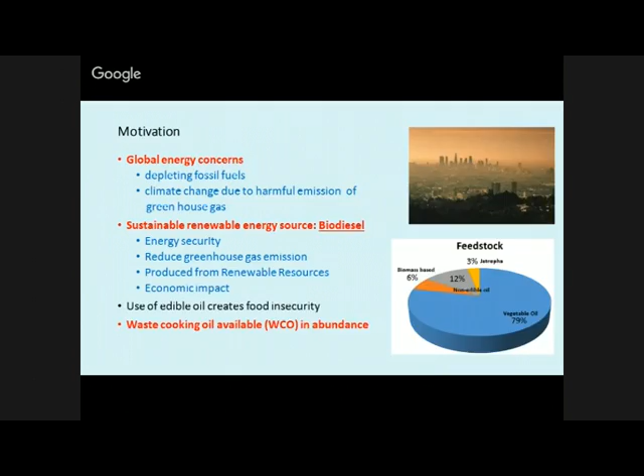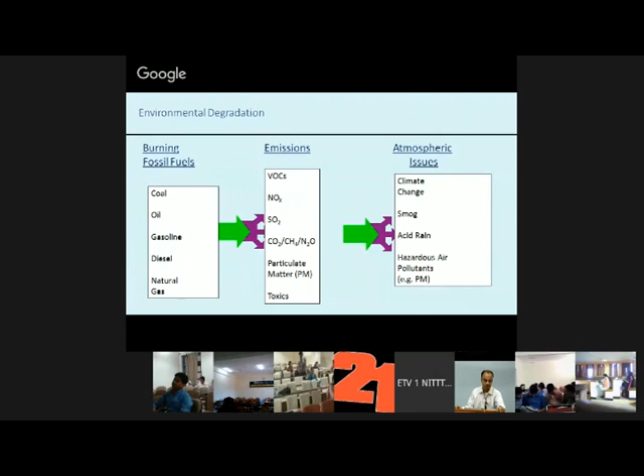As you know, if you use conventional energy sources, environmental degradation is a main drawback. The sources of burning fossil fuels are coal, oil, gasoline, diesel, natural gas. All these after combustion produce emissions consisting of NOx, sulfur dioxides, carbon dioxide, methane, particulate matters, and toxics. All these emissions have a severe impact on atmospheric issues, which causes climate change, smog, acid rains, hazardous air pollutants, and various other things. Due to that reason, there is an impact not only on human beings, but on animals and crops also.

Therefore, environmental degradation has become a big issue in this century, and our objective is to use renewable energy sources in such a way that environmental degradation should be minimized.

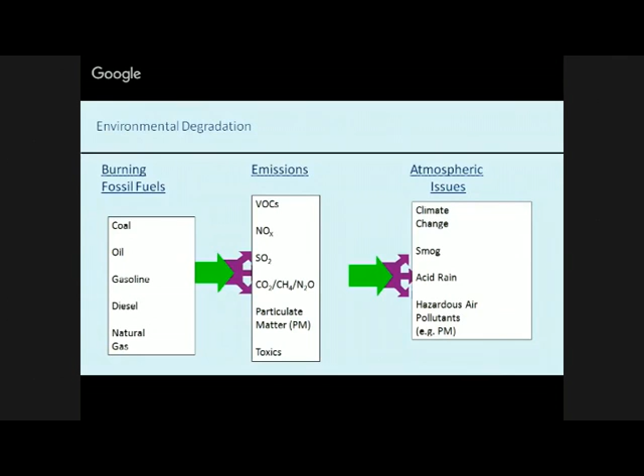In our country, as far as automobiles are concerned, we use petrol and diesel. In most of the other developed world, consumption of petrol and diesel is almost equal, a 1:1 ratio. But in our country, the gasoline demand differs—gasoline, that is petrol, is used in cars and other four-wheelers, whereas diesel is used in trucks. Though the number of trucks is less compared to cars, the total consumption of diesel is very high compared to gasoline. The data up to 2011-12 shows diesel consumption is around 5 to 6 times higher compared to petrol. So a slight change in diesel price will have a severe impact on our economy, whereas a change in petrol price will not affect much.

Ours is a typical special case where a substitute for diesel is more important than for petrol. For petrol, people are substituting with ethanol, but in the case of diesel, we can substitute with biodiesel. So biodiesel is more important from an economic point of view, since our diesel consumption is 5 to 6 times higher than petrol. This is a unique problem our country is facing.

As far as feedstock sources are concerned, at the national and international level, the country which has an excess of a particular source consumes that oil for biodiesel. Palm oil is available in abundance in Malaysia. In the European Union, rapeseed oil is in excess. Soybean is in excess in the USA. Sunflower in Argentina. Jatropha, a non-edible oil, is found in India. And in the Philippines, coconut oil is in excess.

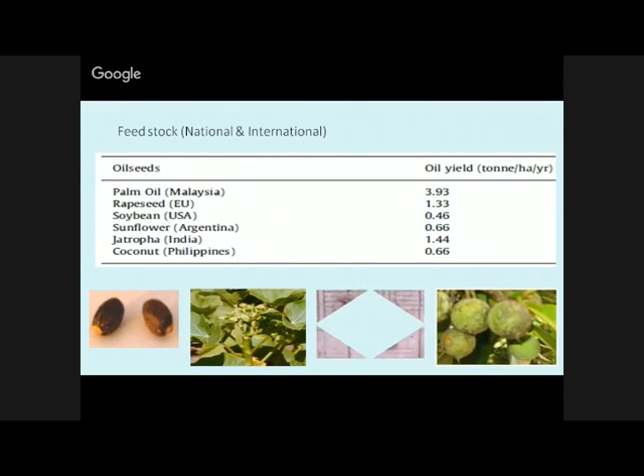Other conventional feedstocks include mahua, palm, karanja, and tobacco seeds—almost any oil, whether vegetable oil or non-edible oil, can be easily converted into biodiesel in principle. So the point is that whatever localized source is available, one should try to convert that oil into biodiesel, rather than focusing on one or two types of species, which is not good for long-term impact as far as nature is concerned.

The non-conventional feedstocks in our country are not very popular—lard, tallow, poultry fat, fish oil, bacteria, algae, microalgae. These are almost non-conventional feedstocks, but experts say they are very important from a future point of view.

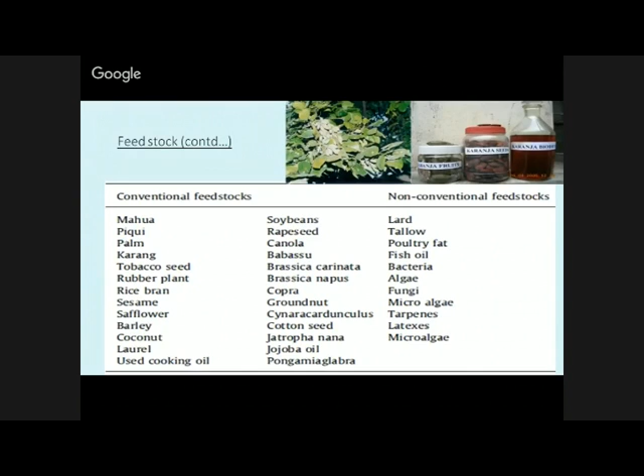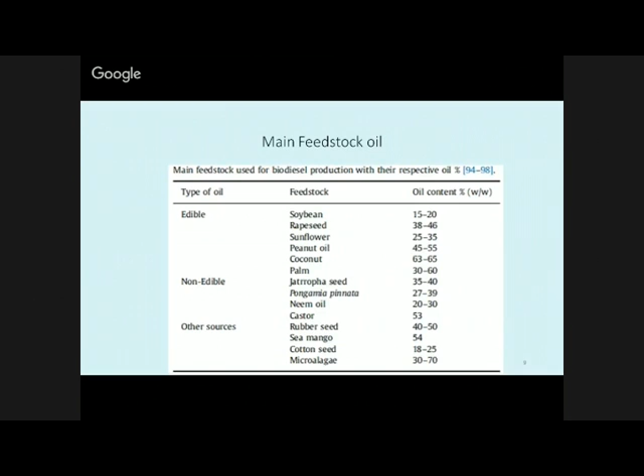In Rajasthan and Gujarat, one of the important sources is Citrullus colocynthis, popularly known as thumba. These seeds are separated from the fruit, and then oil can be extracted from the seeds, which can also be easily converted to biodiesel.

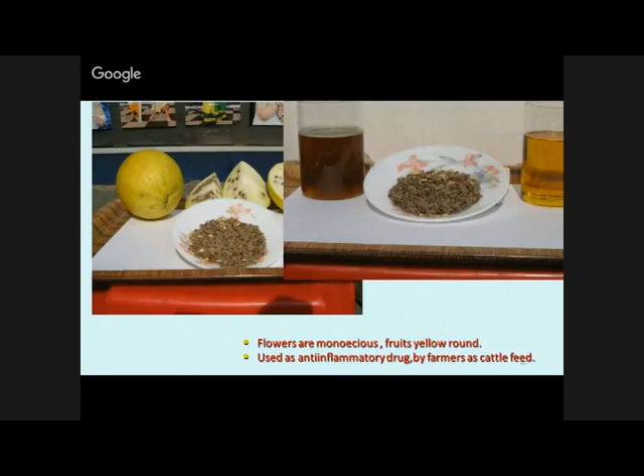This particular thumba has some anti-inflammatory properties. It can be used by farmers. It can be used in cattle feed. The flowers have some medicinal value. So likewise, it has some other applications also.

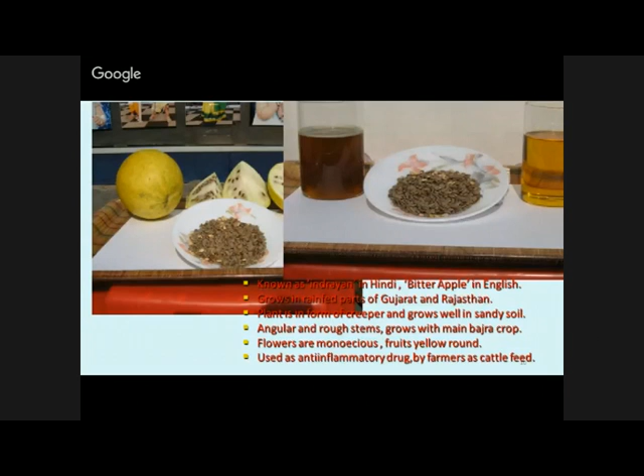And at present, if it is not used for biodiesel, it is sold to the soap industry, which is purchasing in abundance. These seeds are known as Indrayan in Hindi and bitter apple in English.

With these sources, now I am going to discuss the conventional methods or techniques through which we can produce biodiesel. This technique was known even more than 100 years back, but at that time the price of petroleum was not very high. So due to that reason, much development has not taken place, because at that time the per gallon petrol price was quite small. So people focused more on internal combustion engines. But the technique was available even at that time, even in South Africa.

In the conventional method, what happens? There is a mixture of oil and alcohol, mostly methyl alcohol. People say that it is a green process, but the objection is that methyl alcohol is again a petroleum product, and therefore this process cannot be called a 100% green process. If you use biomethanol which is produced through a green process, then we can call it a 100% green process. Otherwise, you have to use, for example, ethyl alcohol or other things. If you use it, then we can call it a 100% green process.

The catalyst, taken on a weight percentage basis, may be homogeneous. At present homogeneous catalysts are the most popular, but at research level, people are working on heterogeneous catalysts. So this mixture of raw oil, alcohol and catalyst is added in a reactor, and a stirrer is at the center portion, through which continuous mixing takes place, and finally the immiscible layer between the alcohol and the oil breaks, and the heavy molecules are converted to smaller methyl ester molecules in terms of biodiesel.

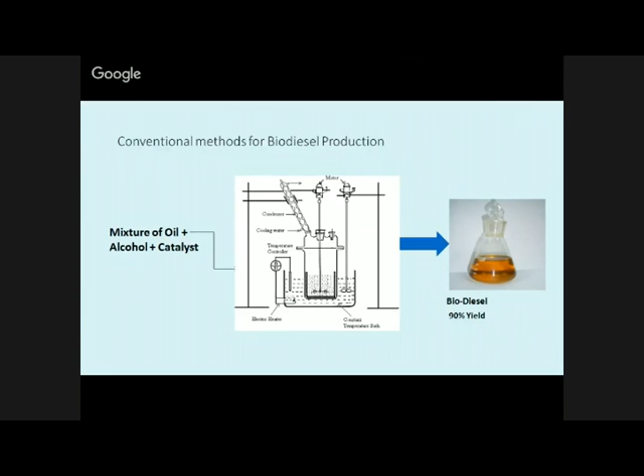In terms of weight ratios, roughly around 100 kg of triglycerides, meaning any vegetable or raw material oil, mixed with 10 kg of alcohol; this reaction is based upon the stoichiometric ratio. Normally, alcohol is taken at double the stoichiometric ratio, so that the reaction is always in the forward direction and cannot go in the reverse direction. If the reaction takes place in the reverse direction, soap formation will take place.

From the chemically correct ratio point of view, we can convert 100 kg into 100 kg of biodiesel, meaning 100% conversion. And besides this, we get 10 kg of glycerin, which is a byproduct. This byproduct has a very high calorific value, and it can be used as a fuel also.

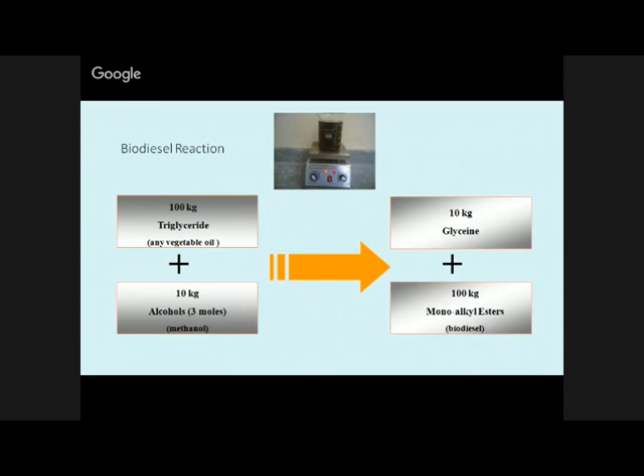If you look at the chemical formula, the fat or oil triglycerides react with 3 moles of methanol, and finally we get glycerol plus FAME, fatty acid methyl esters. This fatty acid methyl ester is the biodiesel we get after the reaction. Now if this reaction is done in conventional reactors, with mechanical stirrers, it requires a huge amount of time, sometimes more than 1 hour.

So the conventional technique has drawbacks: energy consumption is high, time requirement is high, and besides, the process is not environmentally friendly. There are various issues: the catalyst is considered to be a pollutant, and water washing also creates trouble, and therefore new methods are required to reduce the time, with an environmentally friendly process as well as less energy consumption.

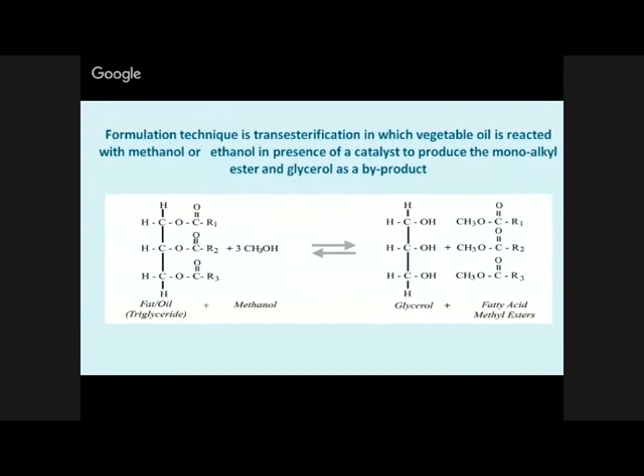This is from the chemistry point of view. A triglyceride reacts with 3 methanol in the presence of a catalyst, and we get glycerol plus biodiesel. So glycerol is always a byproduct when you use this oil plus methyl alcohol in the presence of a catalyst, maybe a basic catalyst, that is potassium hydroxide or sodium hydroxide. In that case, on the product side we always have glycerol plus biodiesel. So glycerol as a byproduct we are always getting.

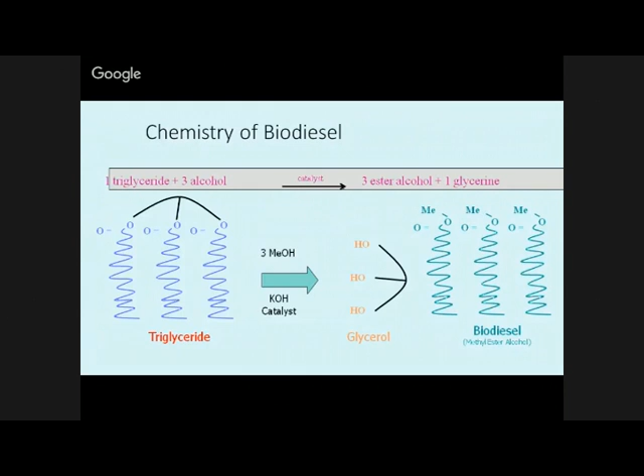In terms of plant point of view or block diagram point of view, let us take an example of karanja oil. If it is mixed with alcohol in the presence of KOH, we get unrefined biodiesel and glycerol. Normally, instead of 3:1, we add excess alcohol. The excess alcohol after the reaction has to be separated so that it can be utilized again for the next cycle. Once the alcohol is removed, we get alcohol-free biodiesel, and then it is washed with water.

After washing, the wash water also plays a pollutant role, and it erodes the land. So if a big biodiesel plant is there, one has to think how to tackle that. Then, after removing the wastewater, the biodiesel is heated to remove the moisture. And finally, the neat biodiesel B100 means it is now a pure biodiesel.

Once it is mixed with diesel, based on how much fraction is mixed, we call it B10, B20. B10 means 10% biodiesel, 90% diesel. B100 means 100% biodiesel and 0% diesel. This B100 we can directly use in compression ignition engines, and people say that up to 30%, if you add it to the diesel, there is no need of any change in the design of the engine itself. Almost the same performance you can get using CI engines.

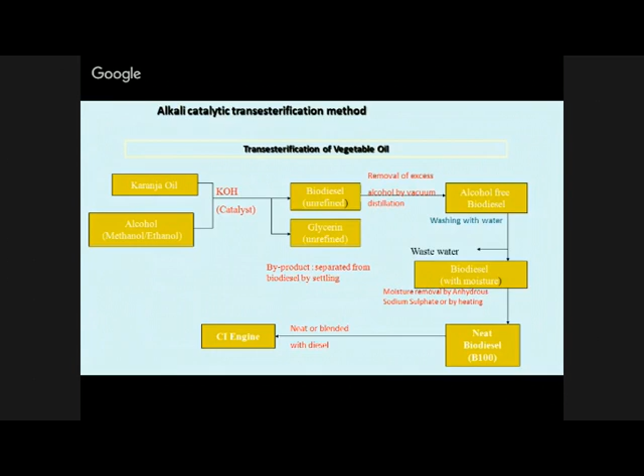As I have told you, there are certain challenges faced by conventional techniques. In the raw feedstock oil, the main important variation is the FFA content, meaning free fatty acid content. If this content is less, say less than 2% or 3%, then in the presence of an alkali catalyst the reaction can take place very fast. But if the FFA content is high, sometimes soap formation takes place, and there are difficulties in the reaction to achieve the biodiesel product. So in that case, two-step reactions are followed, where first the FFA content is reduced, and then in the presence of alkali catalyst the biodiesel conversion takes place.

Besides this, we have to take care that water is not present in the raw oil, because once water is available, saponification will take place, and the oil will be converted to soap, which is the anti-reaction of biodiesel. Besides this, as I have told you, washing is a big problem. So removal of residual triglycerides and glycerol from the product is important. Only then can we get standard biodiesel which matches the standards available in the literature. Of course, glycerin is a byproduct, there is difficulty in complete conversion, and wastewater is a pollutant.

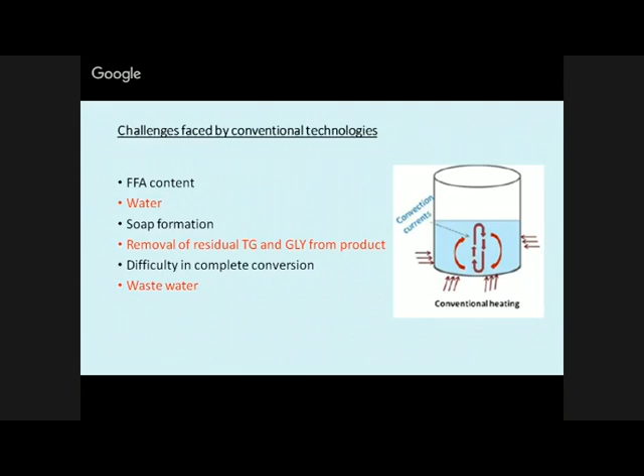Before I discuss the recently developed techniques, known as non-conventional techniques, I would like to classify biodiesel process intensification. The conventional method I have already discussed, which includes mechanical stirring, and its drawbacks also. Now, in the last decade, most of the focus is on non-conventional methods, which include ultrasonic methods, microwave methods, hydrodynamic cavitation, and sometimes hybrid methods, meaning a combination of any two techniques, ultrasound plus microwave, or ultrasound plus hydrodynamic.

In these techniques, ultrasound, microwave, and hydrodynamic, the reaction takes place at atmospheric or slightly above atmospheric conditions, whereas in the supercritical method, the reaction takes place at very high temperature and pressure. So industrial viability is a question mark. But the advantage of the supercritical technique is that the catalyst is absent. The catalyst is a big nuisance, so the main attraction of the supercritical process is that the reaction can take place without catalyst. So we will discuss these non-conventional methods one by one and their status in the literature.

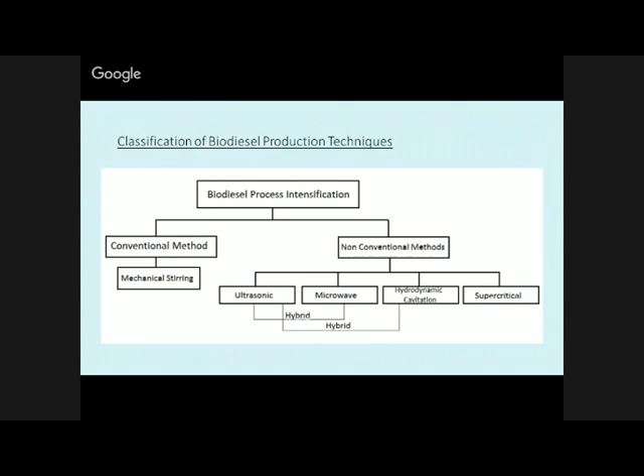Process intensification techniques: PI is the term used to describe the strategy of reducing the size of the chemical plant needed to achieve a given production objective. Means if a plant is efficient, the size will automatically reduce. Any chemical engineering development that leads to substantially smaller, cleaner, and more energy efficient technology is called process intensification.

That is the main objective from a chemical point of view, that a process can be efficient if the size is reduced, time consumption is less, and an environmentally friendly process must be there. So with this objective, the focus in the case of PI techniques is that reaction time should be less, and conversion rate or yield must be high.

In most cases, in conventional reactors, the ratio is 1:6, means twice the alcohol you have to use. Of course, it can be recovered, but still the total cost will increase. So if a lower molar ratio is used as compared to the conventional techniques, that is always welcome. Then low catalyst: as I have told you, the catalyst creates a pollutant. So if you use a lower percentage of this homogeneous catalyst, it is always welcome.

Lower total operating cost and energy consumption is also a focus. Besides this, instead of batch production, people now also focus on continuous production and separation of reaction products. Recovery of glycerol, catalyst, and excess alcohol is also important.

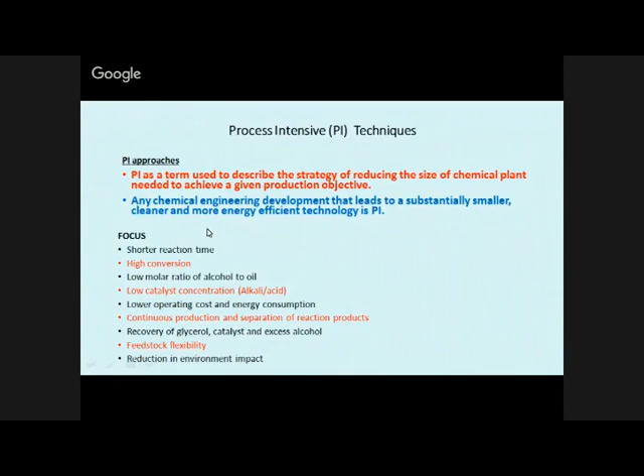Now, among those PI techniques, one important PI technique is ultrasound cavitation. This is from the last decade. Ultrasound has a huge number of applications in the chemical industry. Earlier it was used to mix two immiscible oils, and later on it was thought that it can also be used for the transesterification reaction to produce biodiesel.

In this process, as we see in the right hand side diagram, due to ultrasound waves, very small micron level bubbles are formed. The stages are formation of the bubbles, growth of the bubbles, and then collapse of the bubbles. Due to these three mechanisms, the mixing of alcohol with oil happens very fast, and the transesterification reaction gives biodiesel very quickly. Further, in this process we can get a high FAME yield, expected to be around 96%, in 30 minutes.

Remember that time is a very important factor. If you consume more time, you are consuming more energy. In conventional reactors, the time requirement is around 1 to 1.5 hours, or sometimes 2 hours. Whereas in this case, the same yield and quantity of biodiesel you can get in less than 30 minutes. It means we save time and total energy consumption, plus the quality of the biodiesel is quite good.

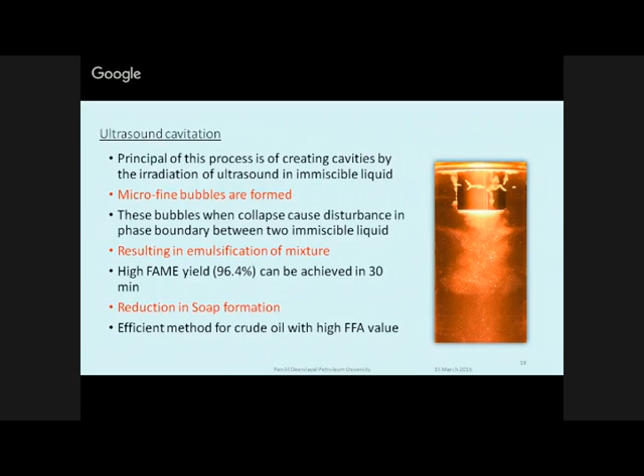Normally, Japanese scientists have proved that frequency of irradiation between the range of 28 to 40 kilohertz. In this frequency, whatever the alcohol and oil mixture is there, they will be converted into biodiesel. Above this frequency doesn't have impact, as well as less than 28 kilohertz frequency also doesn't have an impact for mixing. This is the range of frequency where easily you can convert the oil plus alcohol mixture into biodiesel.

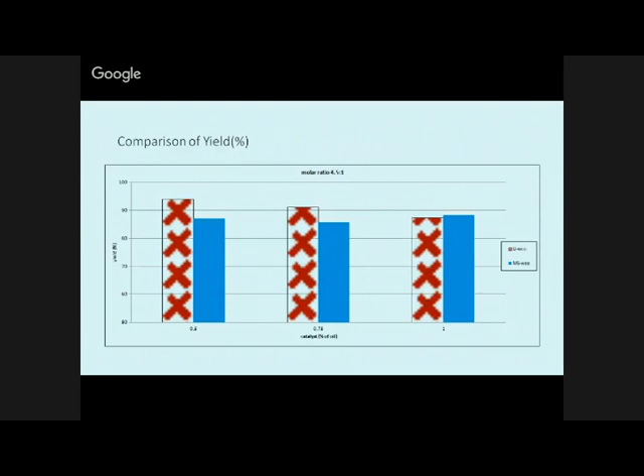These are the experimental data we have achieved when you compare the yield of ultrasound and yield of mechanical stirrers. This is for a molar ratio of 4.5:1, means 4.5 is the alcohol and 1 is the ratio for the case of this oil. You'll see that yield is above 90% as compared to mechanical stirrer. Mechanical stirrer less than 90%, whereas in ultrasound it is more than 90%. The yield is clearly higher in ultrasound as compared to the conventional mechanical stirring method.

Besides this one, you see that there is a drastic reduction in the time. For same conditions, in the case of conventional stirrer, the time requirement is 40 to 45 minutes, whereas in the case of ultrasound, within 15 to 20 minutes, you can get the transesterification reaction. Means a time saving is there, plus at the same time, you can get a good quality of biodiesel.

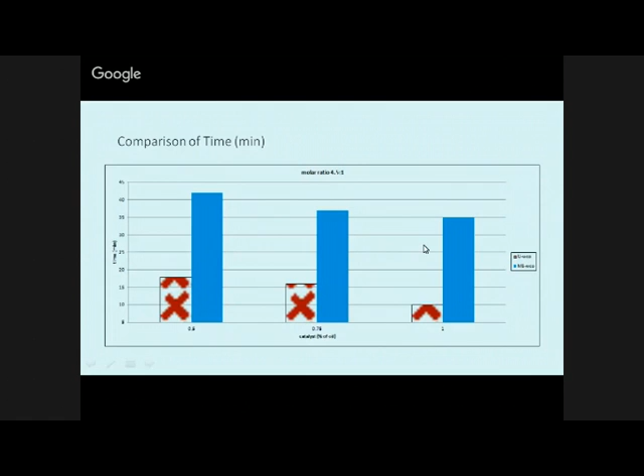This is a typical 100-liter capacity which we have produced in Pandit Deendayal Petroleum University, and at a time we can produce 100 liters of biodiesel. Normally, you can see in the earlier diagram it was a batch production. At one time you can produce it, and then you have to remove that particular raw material, and then again you have to add some fresh material. So that's why it's a batch production.

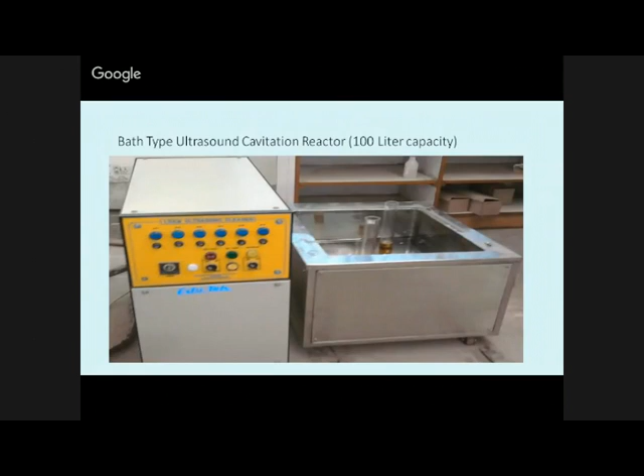People are also focusing on, at a commercial level in the United States, these ultrasound cavitation reactors are also available in a continuous type, where feedstock is added with the alcohol and mixed in this particular portion, and then the ultrasound reactor is there. Due to ultrasound waves, the mixing here will take place, and it will go through this path, and then in this column separation of biodiesel will take place.

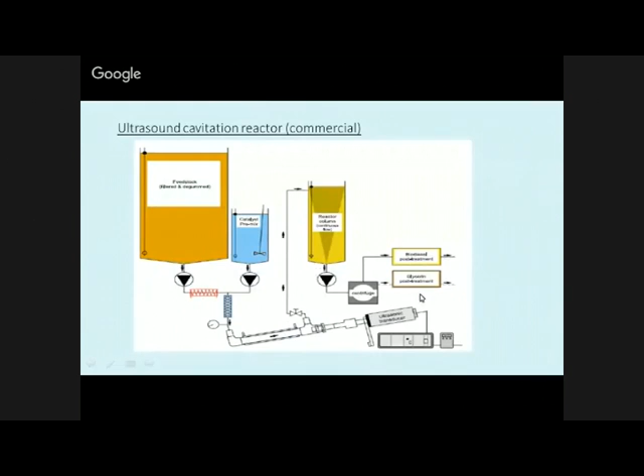Because the glycerol and biodiesel have different molecular weight, by centrifuge, biodiesel is separated from glycerol, and then biodiesel is supplied for the application purpose, and glycerol is again collected and it can be used for its own applications. So this is a continuous type process, unlike the batch production.

The present status of ultrasound assisted transesterification: this process, ultrasound cavitation, is very successful in enhancing the mixing of reactants with either homogeneous or heterogeneous catalyst, leading to significant reduction in reaction time. As I have told you, the reduction in reaction time is very significant as compared to biodiesel conversions using conventional transesterification.

Still, a lot of work has been done in the case of ultrasound, but the majority of the research studies carried out so far focus on parametric and optimization investigations, with a number also studying catalyst leaching and reusability as well as biodiesel quality. Now, catalyst, if you use a homogeneous one, you have to throw it away. If you use heterogeneous catalyst, you can separate it, but very few studies using heterogeneous catalyst are available.

A number of research papers, you can say, by industry or by faculty, are available. But the point is that notably limited attempts have been made to elucidate the mechanistic features as well as the underlying physics and kinetics of the ultrasound. Once the product is there, people can ask, but what is the mechanism behind that? Still, it is not very well known. And particularly when you use a heterogeneous catalyst, the total mechanism, justification for mechanism and logic is still not available in the literature.

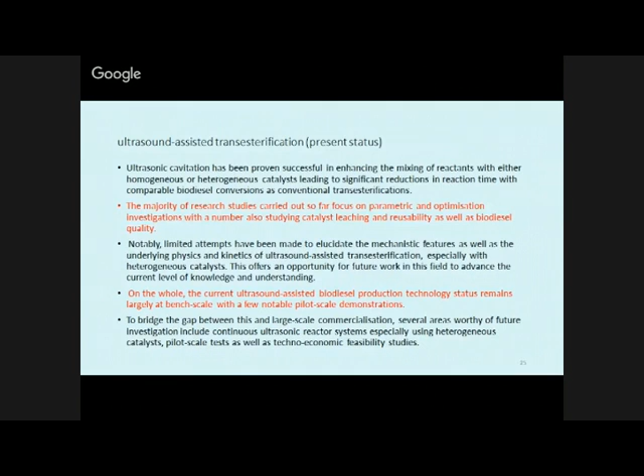To bridge the gap to large scale commercialization, several areas worthy of future investigation include continuous ultrasound reactor systems, especially using heterogeneous catalyst. Because with heterogeneous catalyst, the important thing is that they can be reused. The cost of catalyst can be saved. And pilot scale tests as well as techno-economic feasibility one has to find out. So therefore, economic aspects again play a very important role.

So in this particular hydrodynamic cavitation, the evaporation takes place due to bubble generation, bubble growth, and bubble collapse. These three things take place simultaneously. Due to that reason, the mixing becomes very fast. And this particular system has scalable qualities, means whatever process you design in the laboratory system, you can scale it to a bigger size. Whereas in ultrasound, the scaling is again an issue.

This is a typical hydrodynamic cavitation reactor. This particular schematic diagram is taken from UDCT, Bombay, where they have worked on various types of oils, and the total capacity of the pump was 1.5 watt. Here, this is a storage tank. Through this particular valve, it is supplied to the pump, and through the pump, it is supplied in a pressurized condition to the orifice, and after the downstream side of the orifice, again it is added here. The continuous circulation converts the oil plus methanol into biodiesel, and that can be separated once it has circulated for the specified time.

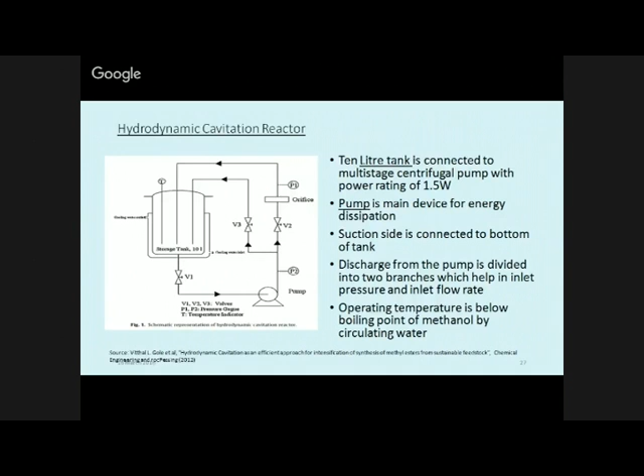This is a diagram related to our hydrodynamic cavitation reactor, which we have manufactured in Pandit Deendayal Petroleum University, and we have published a paper in the Renewable Energy Journal. You can find the diagram, and this is the photograph, where from this tank the suction side is supplied to the pump, and then the pump compresses the liquid and it passes through the orifice. Once it passes through the orifice, the mixture comes out in the form of a spray, cavitation conditions are formed, and due to cavitation conditions the mixing takes place very fast. So that is the thing.

In this case, a vertical chamber is there, and at the bottom portion, the pump is not shown here. Here the pump is fitted, and through that pump it is again supplied in a pressurized condition to this pipe, and continuous circulation will take place. So based upon this, one can easily scale up, because this particular hydrodynamic cavitation has good scaling qualities, and due to these good scaling qualities, biodiesel production is very, very fast.

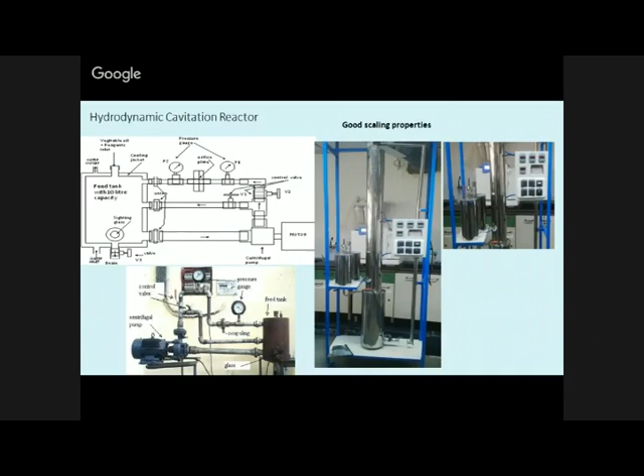Another important technology is microwave technology. We are all familiar that microwave is an integral part of our kitchen. The same microwave, or with slight modifications, can also be applied for biodiesel production. It is a highly efficient heating method, and the main advantage is reduction in reaction time and yield improvement, and due to its simplicity, low cost, and energy economy, it is a very popular method.

Whenever microwave is generated, alcohol molecules are polarized and they are at par with the electric field generated by the microwave. So due to polarity, the alcohol molecules react very fast with the oil, and biodiesel conversion is quite fast as compared to other techniques.

Because of the effective heat transfer, processes with microwave irradiation can be completed in much shorter time than those with conventional heating. The reaction rate of microwave-assisted reaction increases drastically, which reduces the reaction time. So the main focus of using this technique is that reaction time can be reduced, and due to reduction in reaction time, less energy will be consumed, and the process will be environmental friendly.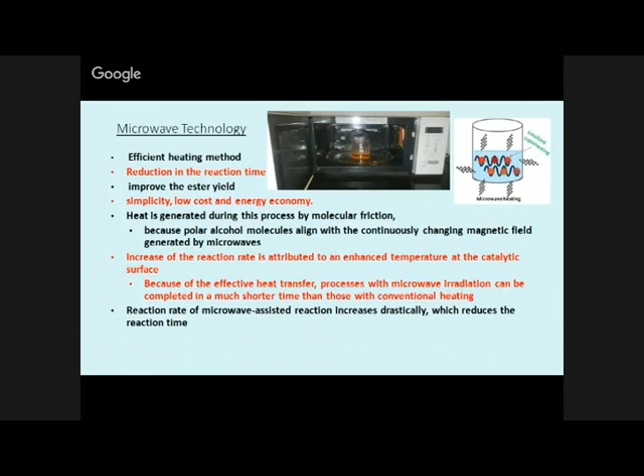Here is a diagram of microwave reactors where, inside, you can put a sample, and by applying the microwaves you can convert the sample oil plus alcohol mixture into biodiesel.

FAME yields are achieved by homogeneous and heterogeneous acid-catalyzed transesterification under microwave radiation. Observing the results obtained in literature, it is concluded that the ratio of energy consumption for biodiesel generation would be decreased significantly as compared to other processes. In microwave also, the energy requirement is very small, and the product we are getting is of good quality, comparable with conventional methods.

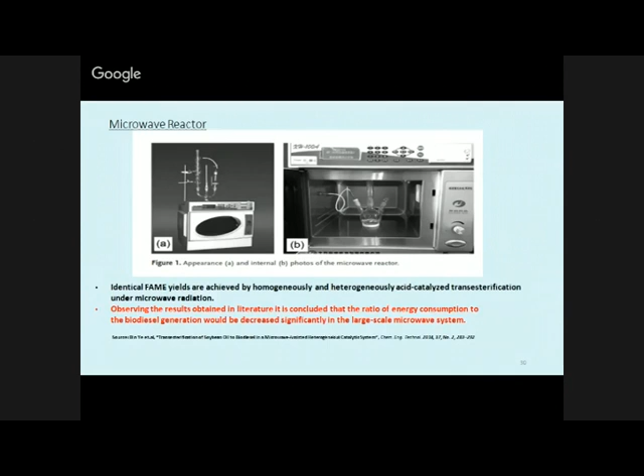Now I have discussed ultrasound and microwave. Couple of experts have worked on hybrid reactors where they have clubbed the two reactors, because each system has its own advantages and certain drawbacks. So they have tried hydrodynamic cavitation with ultrasound.

In this cavitation circuit, the ultrasound horn is put on the upstream side of the nozzle of the hydrodynamic cavitation. Whenever the pressure is high, ultrasound efficiency improves, because mixing will be very fast. So on the upstream side of this hydrodynamic cavitation, the pressure is high, and if you insert the ultrasound horn, the effectiveness of mixing will be improved, and biodiesel production can be converted very fast. This hybrid reactor can give better results as compared to individual ultrasound and individual hydrodynamic cavitation. That's why people are working on hybrid type reactors.

Besides this, one experimentalist worked on a combination of ultrasound and microwave. Here is a reactor, and this is a photograph of it. At the center, from the bottom portion, ultrasound is coming, and through the side portion, microwave is coming. When the frequencies of these two, ultrasound and microwave, superimpose each other, their effectiveness becomes very high. With such hybrid reactors, in a minimal amount of time, one can get biodiesel from raw material as oil and alcohol in the presence of catalyst.

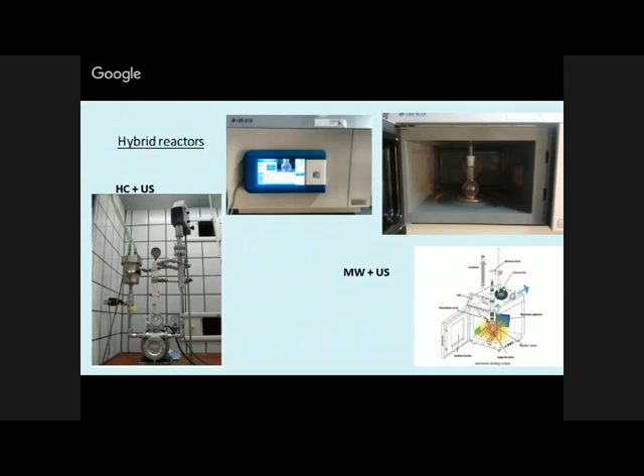Another important, though still developing, technology is the reactive distillation column, where the distillation column is a chemical engineer's forte. In that case, different plates are there, and on these plates, the oil plus alcohol mixture passes in a zigzag path, and through this zigzag path, it finally converts into biodiesel. This kind of process is also being worked on by Professor Kiss from Europe, who works in that particular area.

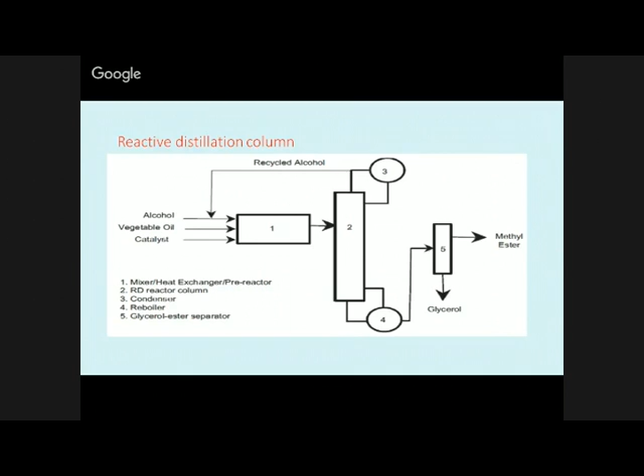Besides this, we are having a membrane reactor. In a membrane reactor, the membrane has a very small pore size such that only biodiesel molecules can pass through, while triglycerides and other components remain inside. But the conversion factor is very small and it is only at research level, otherwise the cost will be very high.

So till now, whatever processes we have discussed have drawbacks, because in each and every process we are using a catalyst. Of course, microwave, ultrasound, and hydrodynamic cavitation can use less of it compared to mechanical stirring, but still there are certain drawbacks.

What are those drawbacks? In the catalyst route, treatment of FFA is needed - if there's a high percentage of FFA, we first have to reduce that content before using the catalyst. Besides this, if water is present, you cannot get the reaction; instead a negative reaction takes place and the oil converts to soap. Therefore water is detrimental. Catalyst is consumed if it is a homogeneous catalyst, and that is again a big issue.

Ultimately, once biodiesel is formed, we have to remove catalyst traces from waste produced, there's low glycerin purity, and generation of wastewater. So all these are drawbacks if you follow the catalyst route. But the advantage is that at low temperature, around 50 to 60 degrees centigrade, with atmospheric conditions, we can achieve it. That's the advantage. The drawback is that using a catalyst creates this problem.

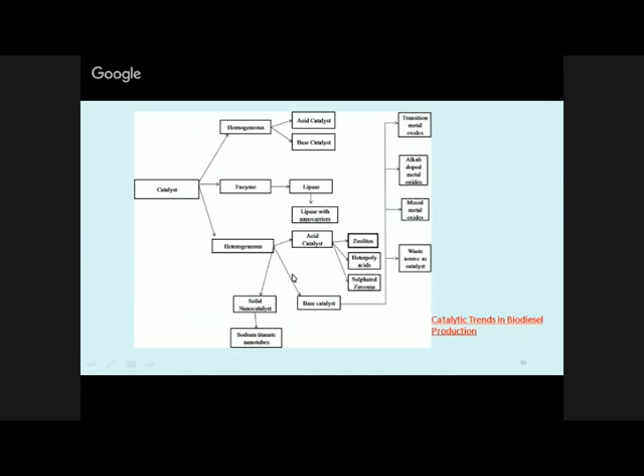Till now, the process I have discussed is based on extracting oil from seeds, and that oil is reacted with alcohol and catalyst. In this process, gums and other impurities also get added along with the oil. So people thought why not go for an innovative process called in situ transesterification, where there's no need to remove oil from the seeds.

The seeds themselves are mixed with alcohol, and through the alcohol and the seeds, biodiesel comes out directly. The advantage is that degumming is reduced, and around 98% in situ transesterification can be achieved - both extraction and degumming are reduced. In situ transesterification is otherwise known as reactive extraction, where extraction of oil takes place along with transesterification of oil into biodiesel. This is a recent phenomenon, and the quality of biodiesel is very good compared to conventional methods.

Viscosity is high in conventional methods compared to standards, and to reduce the viscosity, this kind of method can play an important role, with the final product within standards available in the literature. So the in situ process eliminates the expensive costs employed for oil extraction, and in situ transesterification can be used for any kind of oil seeds and feedstocks.

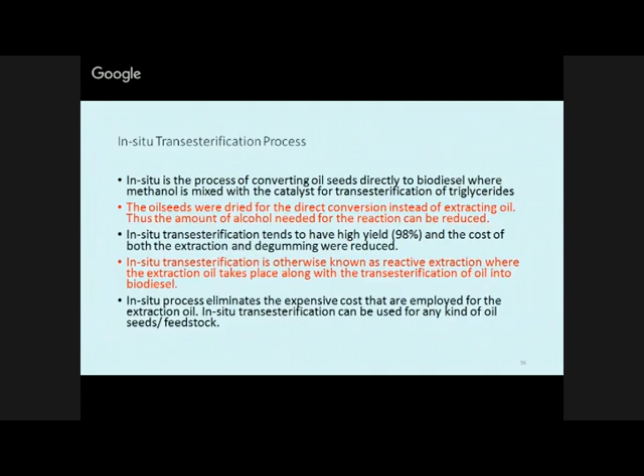The process discussed till now requires going through the catalyst route, and catalyst has its own certain drawbacks. So to avoid that, without using a catalyst, the only path available at present is the supercritical methanol process.

In that case, we don't use a catalyst. At laboratory scale, to convert oil with alcohol, we use an autoclave, where high temperature and pressure is generated, converting raw oil into biodiesel, which is then separated and collected. Compared to the catalytic process, purification of the product is much simpler and more environment friendly. But the drawback is that temperature and pressure required are high.

Let us see how much quantity we are using. This is called a supercritical process because supercritical conditions are generated at high temperature and pressure. For example, oil and fats mixed with methyl alcohol in a supercritical reactor: in this supercritical methanol reactor, temperature is around 350 degrees and pressure of 20 megapascal, meaning 200 bar, is generated.

Now, the product is good, but the conditions are stringent, and because of this, these processes are not industrially viable, because generating 350 degrees centigrade and 200 bars is just like running a boiler. So the cost will be suddenly very, very high. Otherwise, from a product point of view, it is the best one.

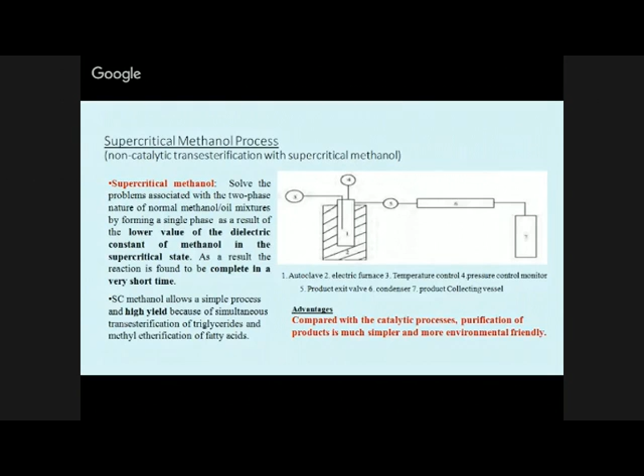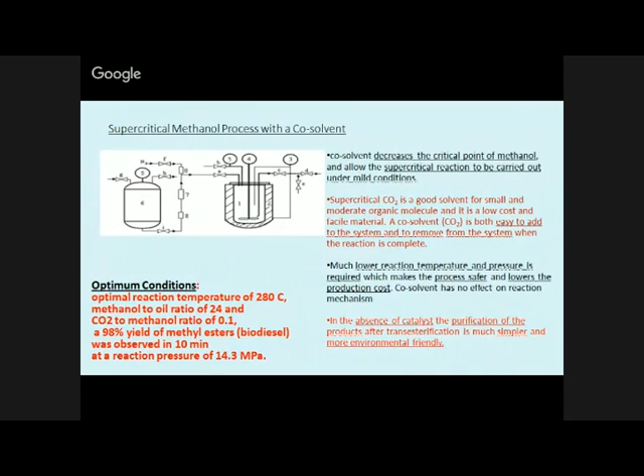One method followed is to use a co-solvent, because co-solvents have a wide range of applications in the chemical industry. Using a co-solvent, it will not take part in the reaction cycle, but at the same time, the stringent pressure and temperature conditions can be reduced, just like with a catalyst.

Here, this particular apparatus is shown, an autoclave of almost 250 liter size. Once the oil plus alcohol is added, afterwards CO2 is added to create pressure.

In this case, the advantage is that you can get biodiesel with lower pressure and temperature conditions compared to earlier, which was 200 bars and 350 degrees centigrade. Now the optimum condition is 280 degrees centigrade, less than 300, quite commercially achievable, with a molar ratio of 24, and 98% yield of methyl esters can be achieved.

Under these conditions, the time requirement is only about 10 minutes, and the reaction pressure is 14.3 megapascal, you can say 143 bar, whereas earlier it was 200 bars. So overall, by using a co-solvent, you can reduce the stringent supercritical conditions, lower the temperature and pressure, and still achieve better results.

People have tried with many other types of co-solvents, including nitrogen and other gases. So depending upon which co-solvent you use, the results will differ.

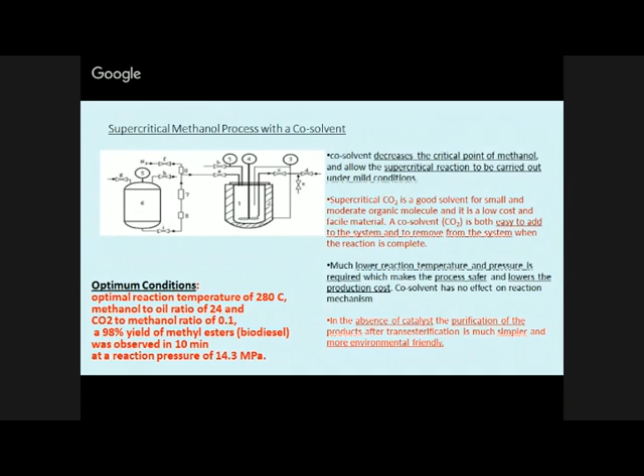Now, this slide is, you can say, what people have been working on for almost the last 5 years. As I have told you, there are two products. Biodiesel is the main product and glycerol is the byproduct. Now in Europe, etc., what happens? The production of biodiesel is quite high. So as a byproduct, heaps of glycerol are produced and the utilization of glycerol is not much.

So the point is what to do with the glycerol; it is a big question in the European countries. Germany also has reduced the production of biodiesel for this reason, what to do with the glycerol. So a new development has taken place, called Saka's process, where Saka was a scientist from Japan. Instead of methyl alcohol, he used methyl acetate. Methyl alcohol mixed with acetic acid can be converted into methyl acetate.

So now methyl acetate is mixed with oil and fat, and the reaction takes place at supercritical conditions of 350 degrees centigrade and 20 megapascal. In that case, what happens? If you look at the reaction, triglycerides with 3 moles of methyl acetate, that is the chemically correct ratio, we can get the FAME. FAME is nothing but biodiesel.

Besides this, instead of glycerol, we are getting triacetin. Triacetin is an additive which is normally added to the fuel. So the presence of triacetin is good to improve the properties of the fuel. So in that case, we have almost nullified the production of glycerol or glycerin.

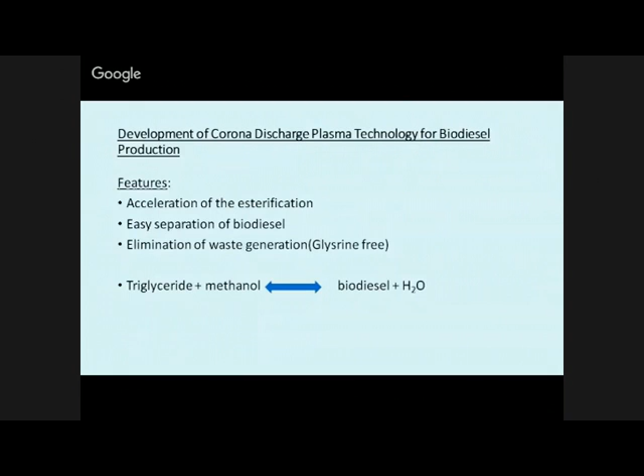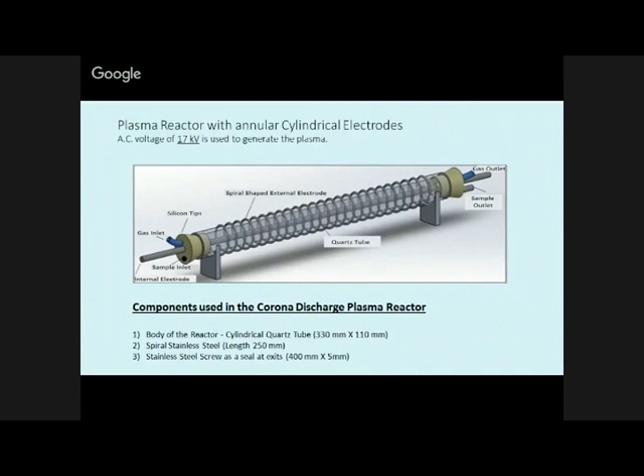In between, there is a glass tube in which argon gas, as a neutral gas, is passed, and at the sample inlet the oil is passed. Between the two electrodes the plasma is generated, which acts as a catalyst for the reaction between the alcohol and the oil. So this is considered the latest study as far as biodiesel is concerned. Plasma application already exists in waste management, solid waste fuels, etc., but for liquid fuels this study is available for the first time, and only at a preliminary level.

Here, I would just like to tell you that since glycerol is a byproduct of our conventional techniques, plasma can also play a role to convert glycerol into synthesis gas, CO plus H2. So plasma has a wide range of applications, and by proper application of plasma, you can convert this biodiesel and this glycerol into synthesis gas; synthesis gas consists of carbon monoxide and hydrogen, and this is

considered to be an input or a raw fuel for fuel cells or any other application, for example, the Fischer-Tropsch method, where this can be converted to liquid fuels. So this particular composition is good for various chemical processes.

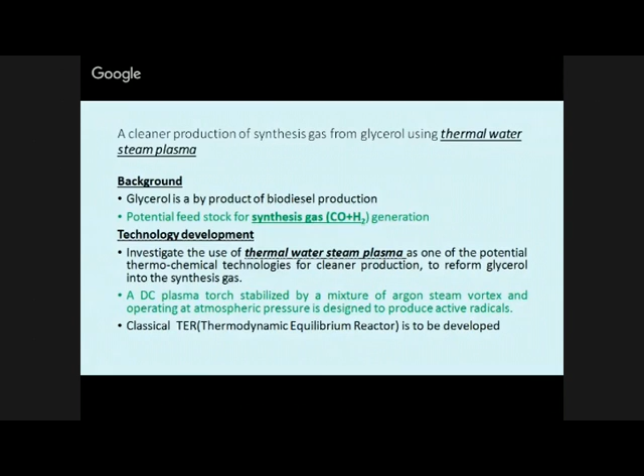Now I will tell you, from the case studies we have done, how to do the experiments for microwave, ultrasound, and various PI techniques, process intensification techniques. Normally this particular process we call optimization of the techniques: at what optimum conditions we get the results. At present KOH is the most popular catalyst. As compared to that, what heterogeneous catalyst can we take?

As heterogeneous catalysts, we can use barium oxide, which is quite expensive, calcium oxide, less expensive but less effective, and besides this strontium oxide is also there. So out of those heterogeneous catalysts, we can select any one. Besides this, our optimizing process parameters are time, catalyst weight, and methanol to oil ratio. 3:1 is the chemically correct ratio, and in the actual process we have to use more. So we can vary these things.

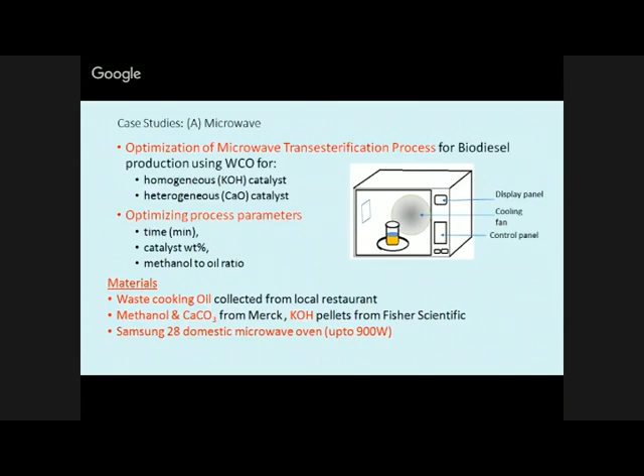Besides this, the materials: we have used waste cooking oil, methanol and catalyst available from the market, and we have used a Samsung 28 domestic microwave oven, which is normally used for household purposes, with a wattage of 900 watt. Now the laboratory biodiesel production process is this one.

Waste cooking oil mixed with methanol and catalyst is put in the microwave, and once the reaction takes place, washing and separation take place, and at the bottom the glycerol is separated, and then the biodiesel, shown in yellow color, is separated, and then the sample is supplied to the GCMS, gas chromatography, where the analysis is done, and then we can find out what yield is achieved. So these are the steps in the laboratory we have to go through to find out the actual data through the experiments.

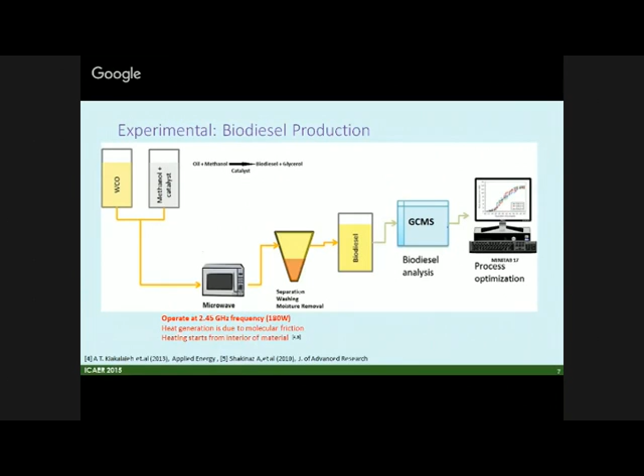Now, design of experiments is a very, very important aspect in biodiesel. You cannot say that by one or two observations the biodiesel is produced. In a scientific way we have to do the design of experiments, and recently in most of the papers, design of experiments is an integral part. For example, the total power supplied was 180 watt. It's constant in all the experiments.

We have to consider the factors. There are three factors. Alcohol to oil ratio X1 is one factor, catalyst percentage another factor, and time requirement is the third factor. So on these three factors, the final yield depends. Now these factors have different levels. 0 represents the central level; from past experience we know the answer comes nearby, plus how much variation there is. So -1 level is the lower side and +1 is the higher side.

Normally these ranges are based upon past experience. Sometimes experiments have to be done randomly, and then we have to decide those ranges. So 3 levels, 3 factors. If you go for a full factorial design, then 3 raised to the power 3 observations you have to take, that is 3 into 3 into 3, 27 observations, and based upon the 27 observations, you have to find out the optimum conditions.

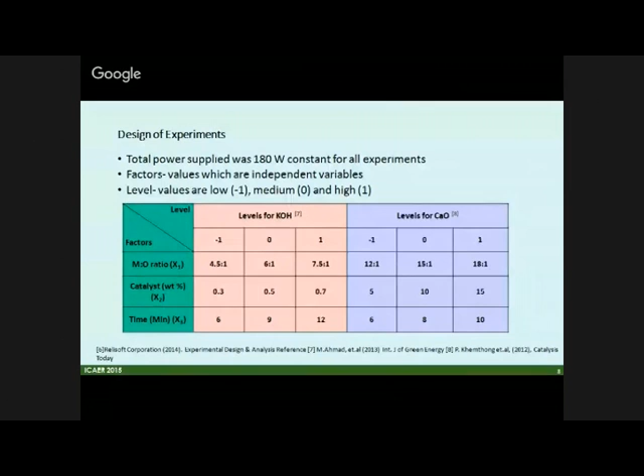If you use software, the number of observations can also be reduced, and they are also part of the design of experiments. I will tell you later on. In the full factorial design, 27 experiments are required, and based upon the 27 experiments, the coded values are -1, 0, and +1, and the 27 observations are written.

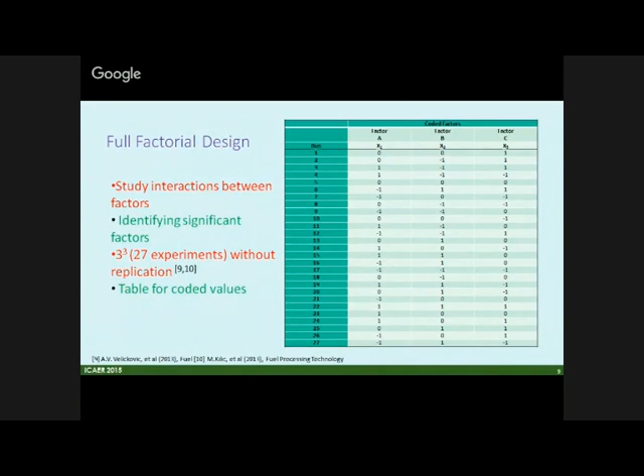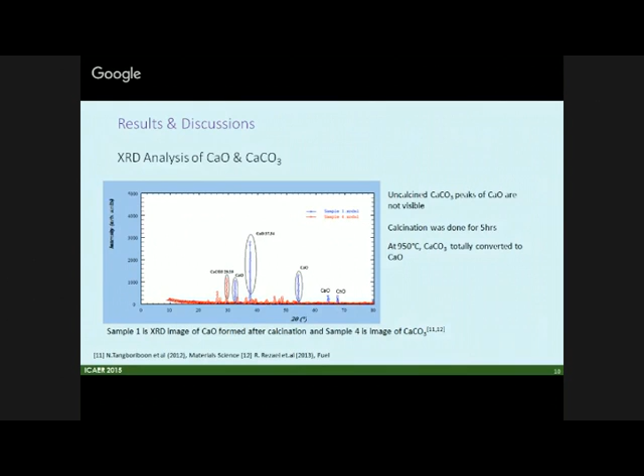So after taking 27 observations with 3 factors, we can get the results. This is XRD analysis of the catalyst. You can see that different peaks are there, and they are characterized; this is the software we are using. This XRD data is for the case of calcium oxide we are using as a catalyst. Beside this one, the GCMS graph is there, where you can easily find out how much area we get, and based upon that area, how much yield we can get. So any person with a chemical background can easily analyze those graphs.

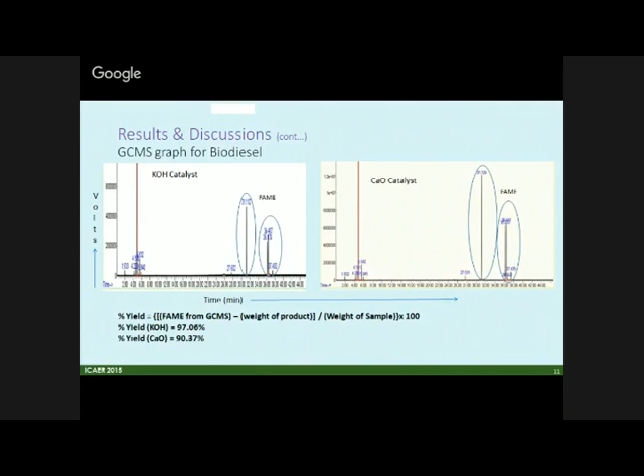So now this is our data. After doing the 27 experiments, we have the yield response for when you use KOH. Another column is for the case of calcium oxide. You will see that the lowest yield data is there and the highest yield data is also there for both cases. So 90% highest yield you can achieve with calcium oxide, whereas with KOH, that is potassium hydroxide, the highest yield is 97%. But we know that with homogeneous catalysts, drawbacks are there, whereas with heterogeneous catalysts, we are obtaining good results.

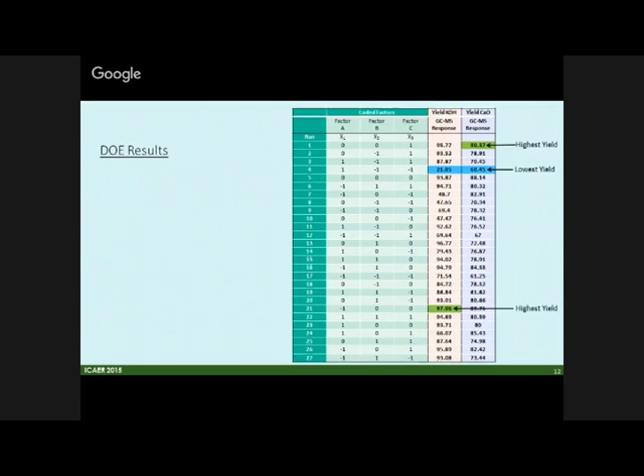Now, once you have got these results, by using ANOVA techniques we can convert them into equation form. Because if you store the data in data form, a huge amount of memory is consumed. Instead of this, we can do regression analysis. We can get this particular equation, and this equation represents the model for these particular observations.

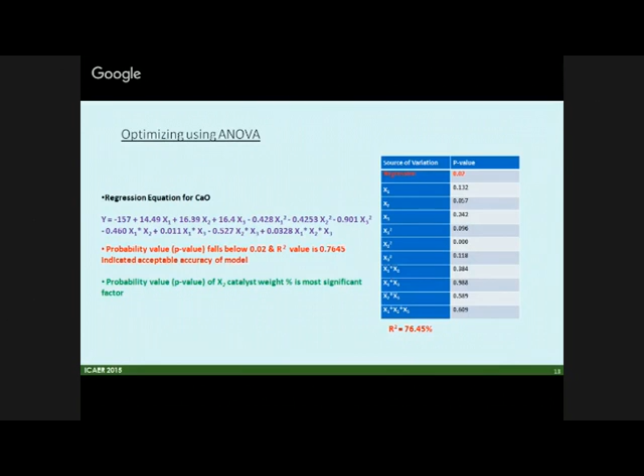Now, with Minitab software the graphics are available. This equation can be developed through Minitab, and based upon the regression analysis, the equations are developed. These are well-known techniques in the literature; one can go through how to develop the equations. Now, whatever equations you have got, we can graphically represent them.

In that case, we can see that here is the peak we are getting. This is the optimum condition, where y is the yield, and time and catalyst are on the axes. So with different percentages of catalyst, time, and yield, we can get these optimum conditions. This is for the case of calcium oxide. Then there is yield with respect to catalyst and molar ratio, and yield with respect to time and molar ratio. So in all 3 cases, we are getting the same results to achieve the optimum conditions.

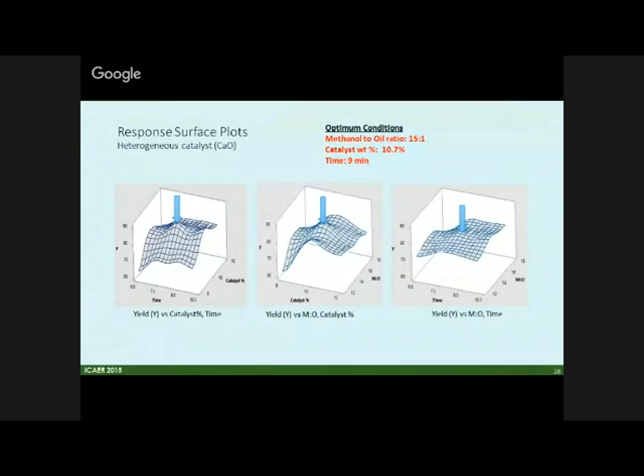These are 2-dimensional contours; in the center portion is where we exist. Based upon that, for this condition, you can find the composition and other things. So for interpretation purposes, we analyze the optimum conditions by converting the 3-dimensional graphs into 2-dimensional graphs. These contours you can generate with Minitab, and Minitab has a huge number of applications, not only in industrial engineering but chemical engineering and mechanical engineering.

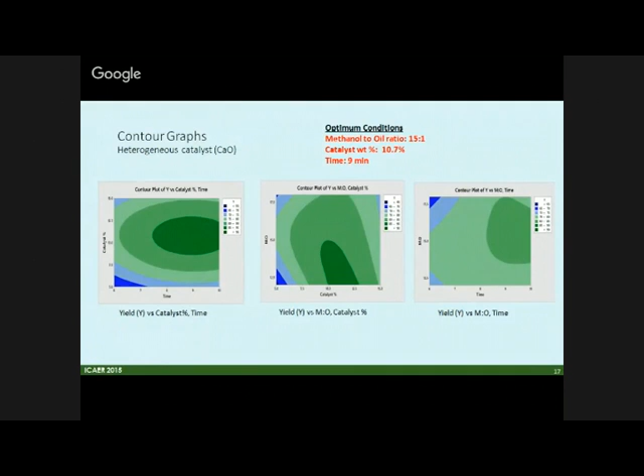So the optimum conditions for the case of potassium hydroxide are a methanol to oil ratio of 5.4:1, catalyst weight quite reduced at 0.65%, and a time requirement of hardly 9.5 minutes. Whereas in mechanical stirring, this time requirement is around 4 or 5 times this particular condition.

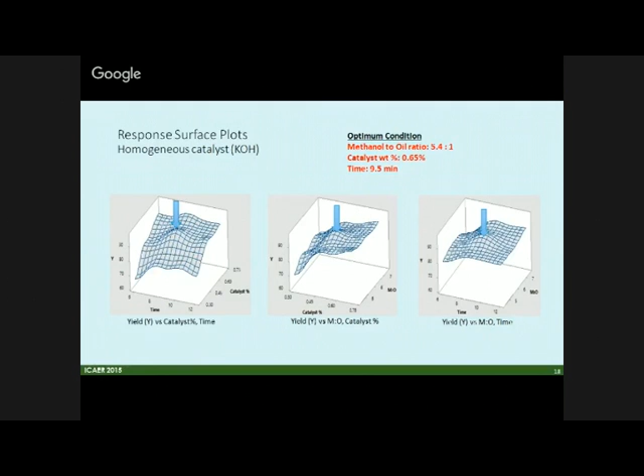These response surface plots you can easily generate in software, where with well-established regression techniques you can get the answer. These are all the three-dimensional graphs we can generate.

So finally, once we produce the biodiesel, we have to check whether its properties are matching with respect to the standards. The properties are flash point, cloud point, pour point, calorific value. Viscosity is a very important property. Normally, the viscosity of biodiesel is slightly higher as compared to diesel. So all these properties and density we have to compare.

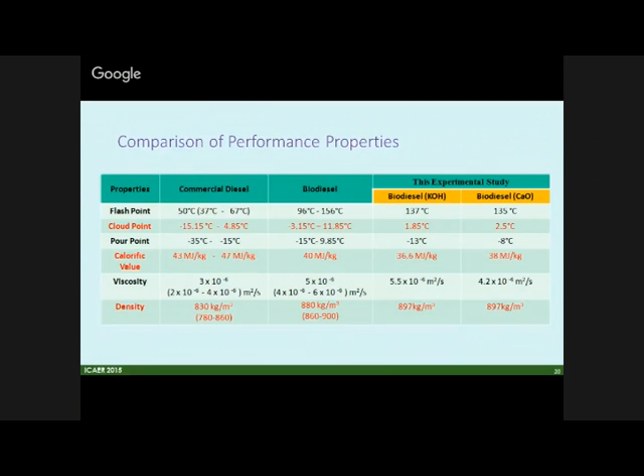Because ultimately, this is a very important aspect. Once we produce a biodiesel, we have to check it with respect to properties. Without properties, we cannot say whether it will satisfy the requirement in the case of engines. So these requirements are a must, and once they are satisfied, we can say that the process is satisfactory, or the application of homogeneous or heterogeneous catalyst satisfies our conditions. So comparison of performance properties is a very integral part.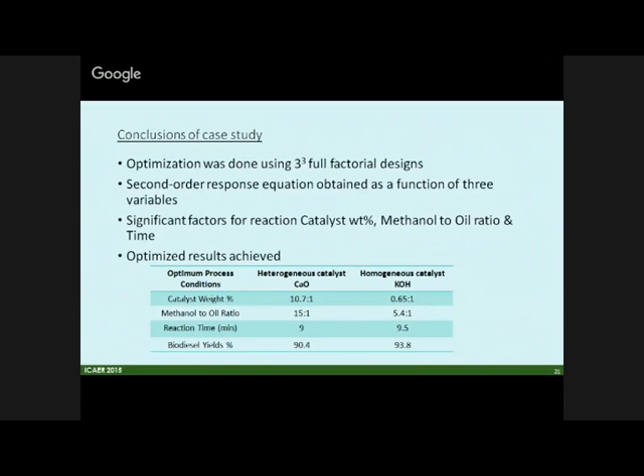Another important study which is under process is supercritical conditions, where we are using an autoclave at the center portion, and without catalyst we can take a sample of 50 ml with alcohol plus oil. In the absence of catalyst, at high temperature and pressure conditions, say more than 200 bars and 300 to 350 degrees centigrade, alcohol plus oil can be converted into biodiesel.

We have a project of GEDA, Gujarat Energy Development Agency, and based upon that we are conducting those studies in PDPU. We also have the Center for Biofuels and Bioenergy Studies at Pandit Deendayal Petroleum University, and laboratory facilities are at a developing stage.

Now, the final aspect I will discuss is the environmental concerns. You will see that as compared to diesel, there is a significant reduction in pollutants. CO is reduced 67%, soot particles are reduced 50%, NOx and CO2 are also reduced. NOx sometimes slightly increases, but with proper injector pressure, NOx can also be reduced.

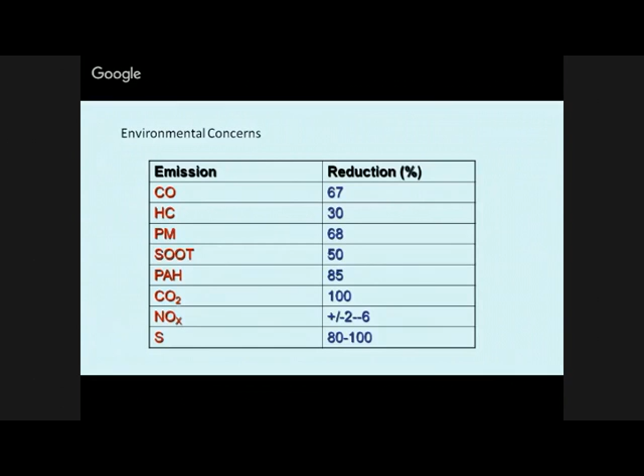Normally, in the conventional diesel cycle, the CO2 emitted into the atmosphere is not converted back into petroleum because it takes a large number of years. Whereas in the case of biodiesel, whatever CO2 is emitted is again absorbed by the plants, and in the next cycle it can again be converted into crop. Therefore, the combustion of biodiesel is considered renewable, whereas combustion of conventional petrol or diesel is not, because it is an open cycle.

Whereas biodiesel is a closed cycle. With every crop, the cycle will be rotated again. So that is the difference between CO2 emissions of biodiesel and CO2 emissions of conventional diesel. In biodiesel, it is a closed cycle, whereas in the case of diesel, it is an open cycle.

And greenhouse emissions are quite less. With B100, you can see that as compared to other methods, greenhouse emissions are very, very small as compared to gasoline, LPG, diesel, significantly almost less than half as compared to gasoline and diesel engines.

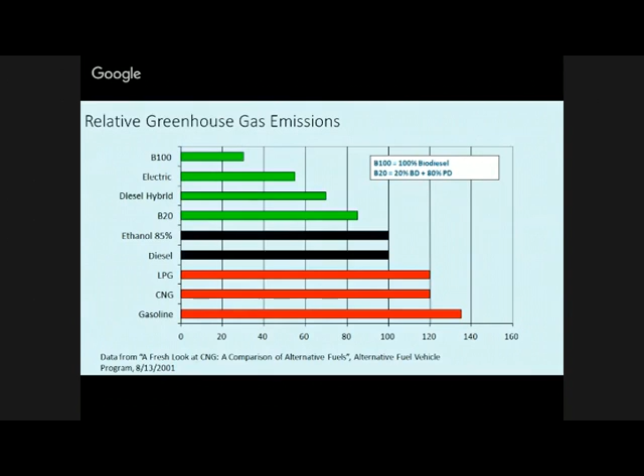So in this kind of scenario, biodiesel can help. In Delhi and other metro cities, a lot of smoke is there. This smoke can be reduced by encouraging the application of biodiesel and by replacing the conventional diesel. So biodiesel can help make this a scene of the past. Particularly in Delhi and other metro cities, the smoke is a big problem.

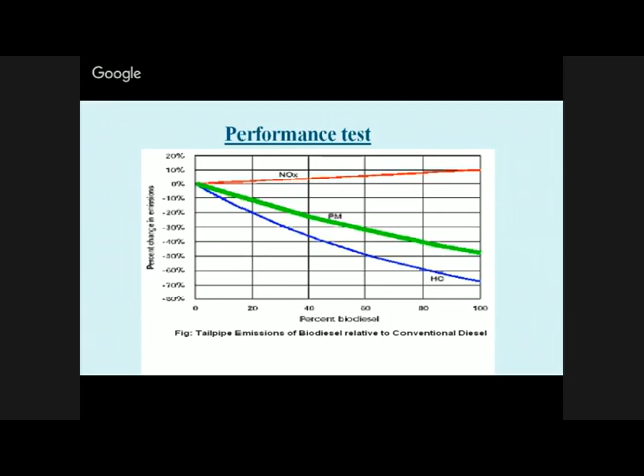Besides this, algae can also play a very important role. Algae as a source has a very high potential as compared to the conventional ones. Up to 70% of algae biomass is usable oils. Algae can survive in water of high salt content, meaning sometimes one can grow the algae even in sea water. Earlier it was unusable, but now algae has a huge potential. As shown in the right hand side diagram, this algae can produce a huge amount of oil.

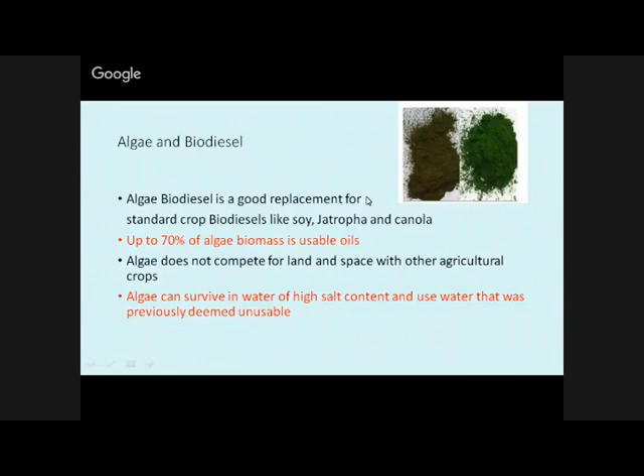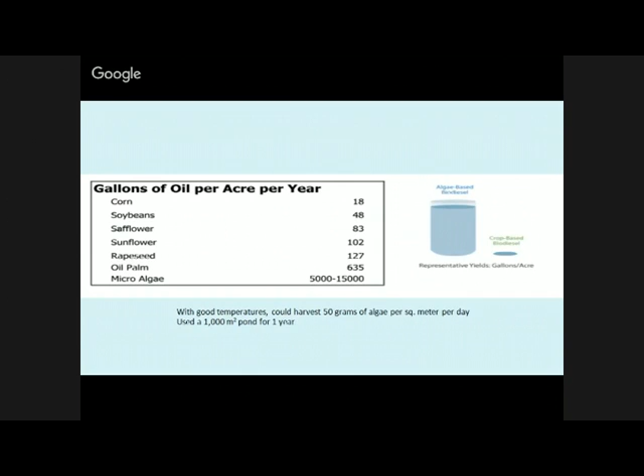This slide clearly shows that, as compared to other sources, microalgae gallons of oil per acre is very, very high as compared to the other seeds. So due to that reason, this has a good potential. And at the same time, the growth per hectare is very, very high as compared to the others. So algae biomass is converted into biodiesel plus spent biomass, and other products are converted into animal feed and methane. So algae is a very, very valuable thing as far as the source is concerned.

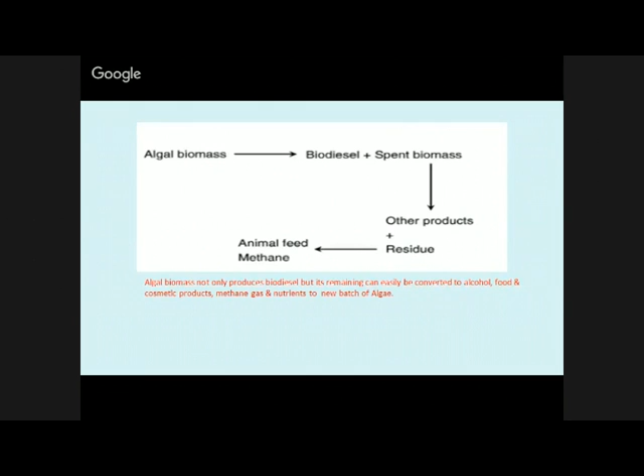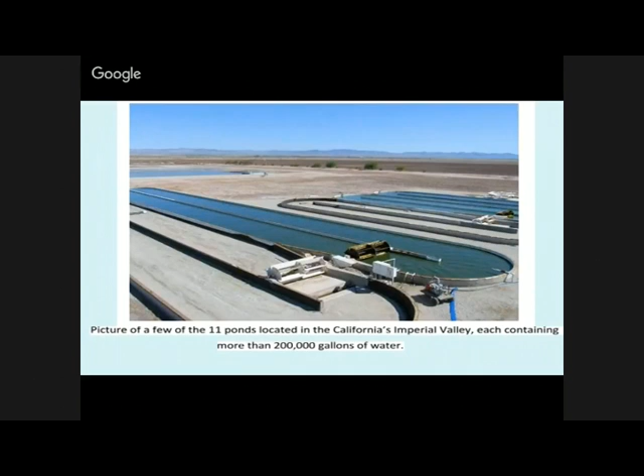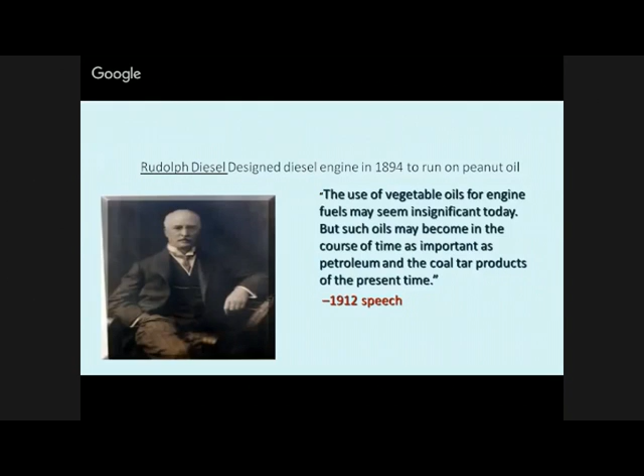So let me finish with this one. Rudolph Diesel, in his lecture in 1912, which is a recorded lecture, said the use of vegetable oils for engine fuels may seem insignificant today, because at that time people just laughed at him, asking why he was trying vegetable oils when petrol was available. But 100 years back, he forecast that such oils may become in the course of time as important as petroleum and the coal tar products of the present time. He had already predicted that vegetable oils would be used in engines, and after 100 years, back to square one, people now think vegetable oils are the main source for engines. So that was the vision of Rudolph Diesel.

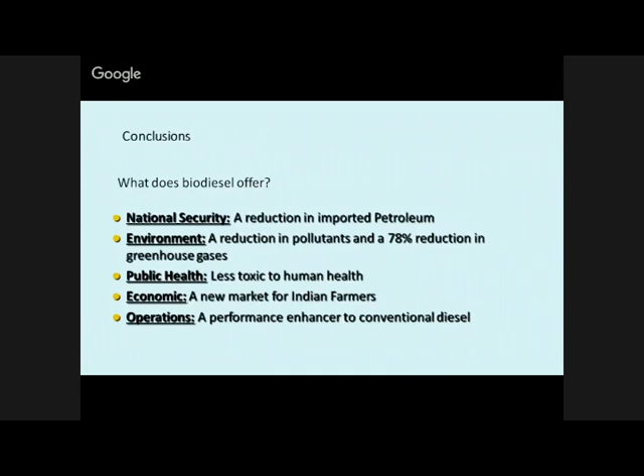Let me conclude with that. Biodiesel can give you national security; from an environmental point of view it's good, from a public health point of view it's good, economically it can give a new market for Indian farmers, from an operation point of view it's also good, it can help mankind, and energy farming is also possible by using biodiesel.

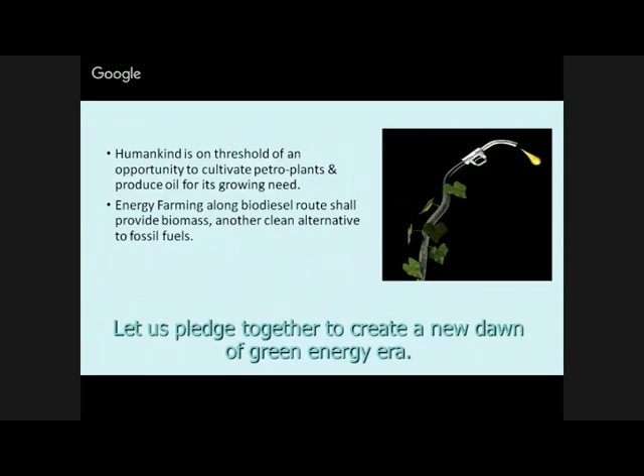So let us pledge together to create a new dawn of the green energy era, in the long term. Why is this important? Because it is a closed cycle. Whatever we grow, we use it, then emit it, and again carbon dioxide is absorbed. From that point of view this is very important, and any cycle from a development point of view has to be sustainable, and sustainable means it's a closed cycle. With our conventional energy sources, we are using an open cycle, which is a major drawback.

So finally, let me finish this lecture with the sentence given by Yukteswar Giri: so long as you breathe the free air of earth, you are under obligation to render grateful service. So this is a very important aspect, and with this objective, I am finishing.